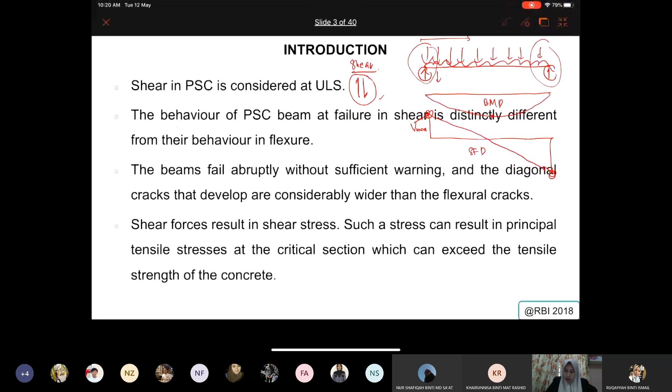Okay. Wait only, because just now it's already the something.

So shear in pre-stressed concrete is considered at ultimate limit state. The behavior of a PSC beam at failure in shear is distinctly different from their behavior in flexure. In terms of failure, shear is different from flexure. Flexure is when the failure of your beam is caused by moment or bending, and the beam fails abruptly without sufficient warning.

So what's the comparison between shear and bending moment? When bending moment failure happens, you'll be able to see the beam actually bend slowly until it fails. But when you have shear, normally it will appear only as a small crack, and then suddenly when the beam fails to cater the load from shear, it will fail abruptly, cracking, and there will be a big gap—it's already collapsed.

The diagonal crack that develops is considerably wider than the flexural crack. Shear crack is normally in diagonal direction, not straight direction—it will normally be diagonal. So diagonal crack is normally considered as shear failure.

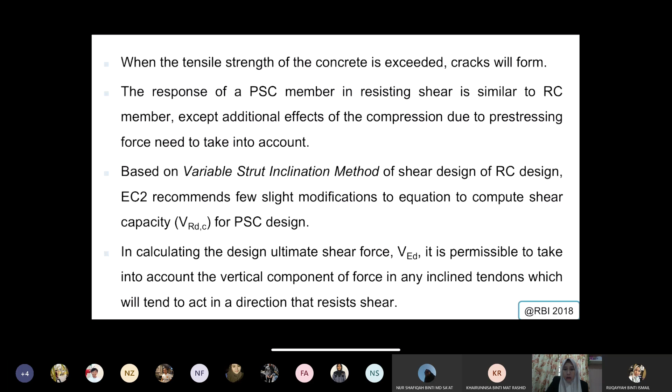So in calculating the design ultimate shear force, VED, which you calculate from your self weight and your loading, it is permissible to take into account the vertical component of force in any inclined tendon, which will tend to act in a direction that resists shear.

So looking at this, just to go through this before we go any further—for a concrete beam, for a typical reinforced concrete beam, where will be the location of shear failure to happen? Anyone, may I know the answer before I call a name? Does anyone know where the shear failure normally appears? Where will the shear failure always appear—the location in a beam?

Fitri says near the support. Jacqueline says the middle, at the middle. Anyone else? Aina? Maybe?

Middle, between support and at the mid span.

You guys also have to be aware when you design your structure member. It's not about your capability in terms of answering at the mid span, or your capability to solve questions or answer past years. I know that's what you've been trained for, because you need to answer exam questions, final exam questions. So when you answer questions, normally all the parameters are given, so you only have to design within the parameters, whatever information is given, because we have kind of a constraint in answering questions in the examples or in your final past year's questions.

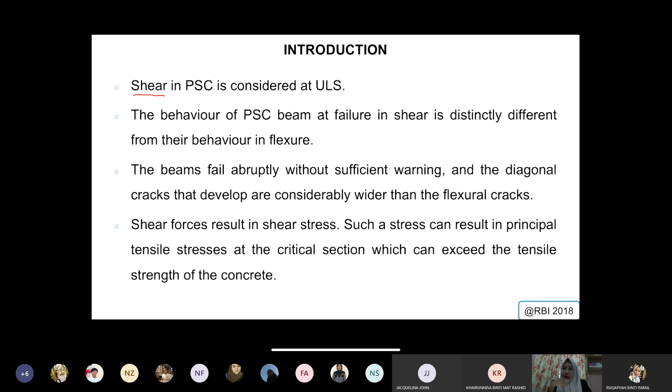So the word shear, you have to understand it well, because it's not just about knowing where the failure is, but you also have to understand why it happened, how it happened. Let's take a look at this.

We have one simply supported beam, a very common simple beam. We have a UDL load applied. Normally the first thing we do when we analyze any structural beam is we come up with the bending moment. So we know it's something like this - this is your bending moment diagram. Bending moment is zero at the support, and there's a maximum moment at the center.

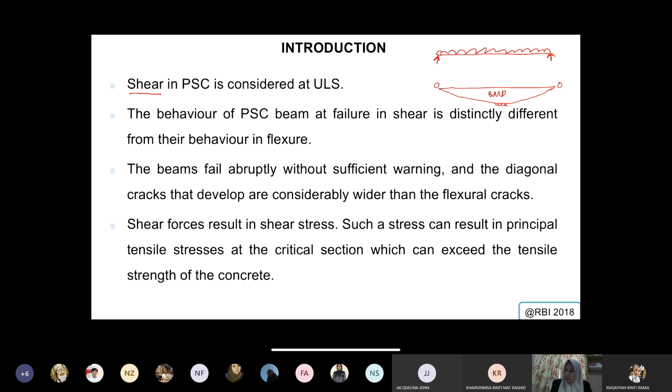So when the failure of a beam is caused by the bending moment, we call it flexural failure. So another diagram that we always draw, we always refer to, will be your shear.

This simple diagram also gives you so much information for your understanding. You see that at the maximum point, the maximum failure will happen. This is the maximum capacity, taken from this value - this is for moment. The same thing for the shear - the maximum happens here. So that's why normally for shear, failure will happen near to the support.

Why? The behavior of the shear is always like this. This is a shear because you have two different positions or directions of load applied - one is going up, one is going down. In our case, one down is the load applied, and one up will be the support. So theoretically, we say that whenever load is applied to a beam, it will be supported by a support.

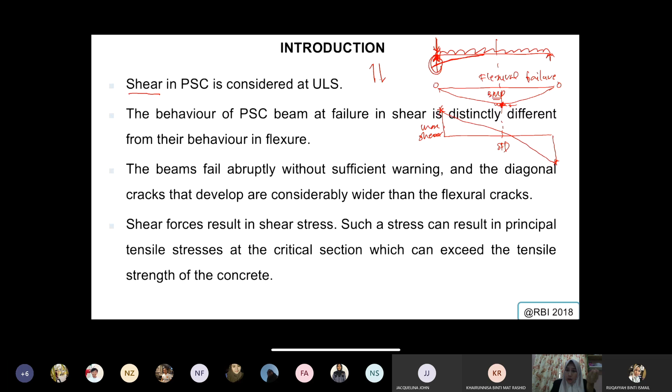But what will happen if the beam itself is kind of weak, both not in sufficient condition in terms of the load applied and also the support - then it will cause the shear to happen. The shear happens when the material is not compatible with the load applied and not compatible with the support used. So this position is where normally you will see the shear failure happen.

A simple diagram like this is able to explain the behavior of one span of a beam. This is very basic understanding that you should be able to explain, especially considering you almost graduate. When you design, you must always counter these issues, because we know a beam will fail in terms of moment and will fail in terms of shear.

When you do your RC design, these are our two main failure issues covered in RC as well. So the same goes for your pre-stress design, because it's still a beam with an additional tendon, of course.

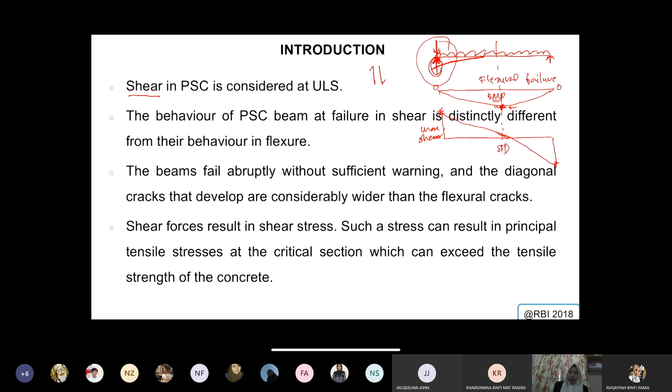Okay, let's take a look next. Okay, we have covered this. So in a way this is like the shear force that we consider when we design for shear. We take into account the vertical component of force due to inclined tendons.

Where pre-stressing force, we multiply with the partial factor of safety, which is 0.9 as usual. So this increases shear resistance considerably by enhancing the shear capacity, which is the shear resistance.

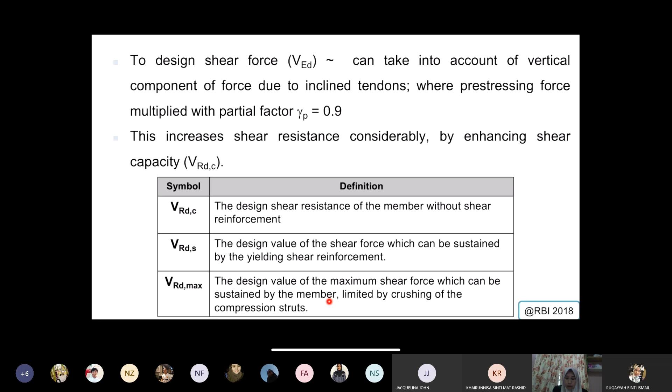So we have a few conditions whereby you have resistance VC, which is without shear reinforcement. So we have resistance VS, which can be sustained by yielding shear reinforcement, and also you have shear resistance maximum, where the design value of the maximum shear force can be sustained by the member, limited by crushing of the compression strut.

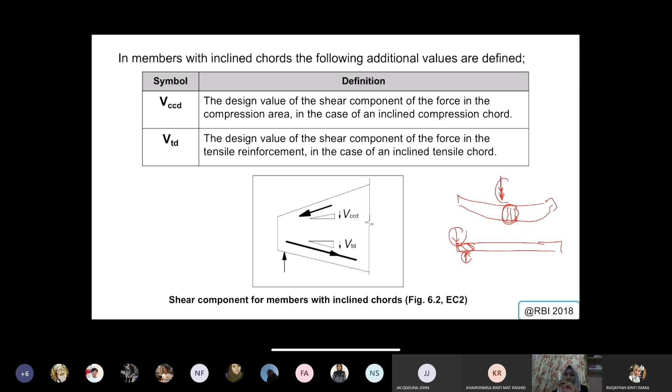But for shear, the thing is a bit different because you have two different forces applied, and the failure will happen something like this - the crack is inclined. So the relationship between the failure, which is the crack in this case, and the direction of the force, and also the support or the load applied, it cannot be related directly as you relate the failure and the load applied for moment calculation. So that's why you have to consider the direction or inclination of the crack when shear happens.

All right, for example, like this figure you can see - this figure is very clear, right? I really like this figure because it shows the location of each failure that happened in one particular beam. So this beam is actually not a simply supported beam, it's a continuous beam. It's very common when your beam looks something like this for your moment - you have hogging here, and positive sagging there. And the same thing with your shear.

Cracking in pre-stressed concrete beam at ultimate load depends on the local magnitudes of moment and shear. So the crack is always the initial cause of a failure, the initial sign of failure. So the more cracks that happen, the worse the failure will be to the beam.

So here let's take a look at region A. You will see the vertical line here, something like that - this is what we call a flexural crack. Flexural crack means that you have your ultimate limit state in flexure, meaning the failure or crack is caused mainly, solely, by moment only. So that is where we initiate it, or we call it region A, meaning located at region A.

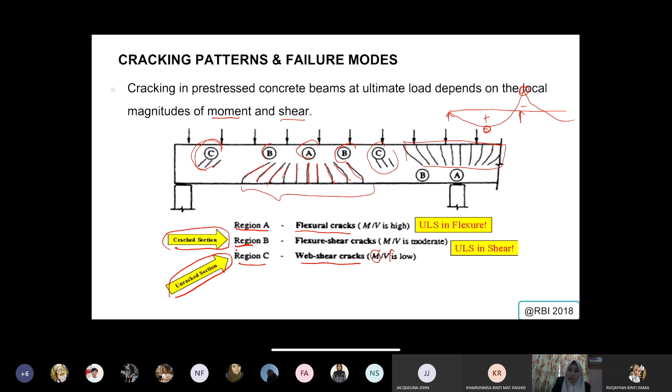This is region A. Here you have A, and you will see vertical cracks below, near the underneath of the beam section, and another one above. So it actually acts for your moment, moment for sag and also moment for hogging. All right, so this is the explanation of each typical region.

Let's go through it as explained before. In the region where the moment is large and shear is small, like M over V, we have a higher value, so the moment is higher and the shear is small. So vertical flexural cracks appear after the normal tensile stress in the extreme concrete fiber exceeds the tensile strength of the concrete.

So we have it here. This is region A. At this point, the normal tensile stress in the extreme concrete exceeds the tensile strength of the concrete, and that's why you have the crack up here.

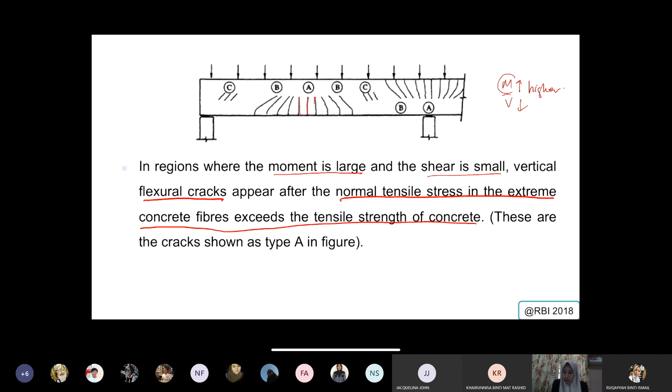Next we have region B, where both the moment and the shear force are relatively large — could be moderate, could be large, more or less the same. The flexural cracks, which are vertical at the extreme fiber, become inclined as they extend deeper into the beam, owing to the presence of shear stresses in the beam web.

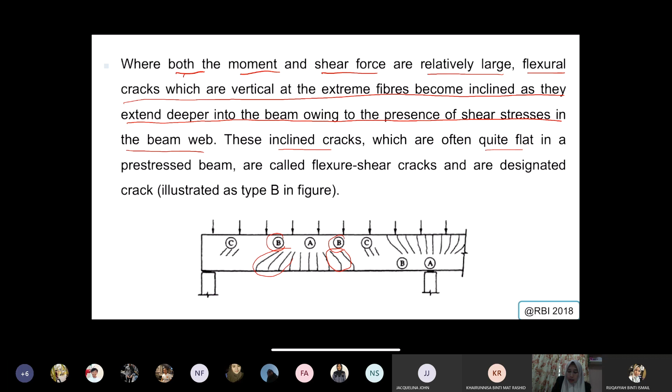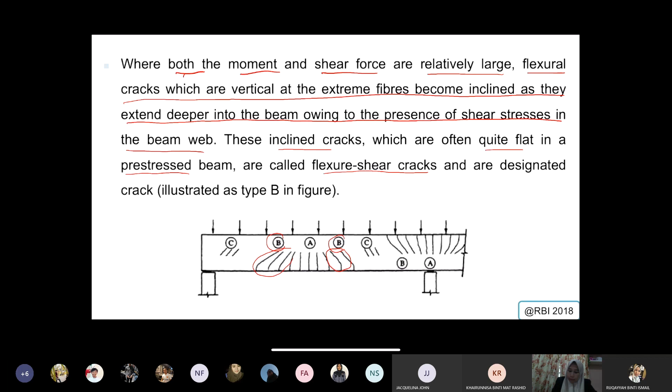That's what actually causes the inclination of the crack at this beam region. These inclined cracks, which are often quite flat in a pre-stressed beam, are called flexure shear cracks — a combination of two failures caused by moment and by shear. We call it flexure shear crack, designated as B. You can see it here.

If adequate shear reinforcement is not provided, the flexure shear crack may lead to what's called shear compression failure. When you see the crack forming, in design you always want to avoid the failure from happening. If we know the failure will happen, we provide reinforcement to avoid it. If you don't provide it, that's where the failure will happen.

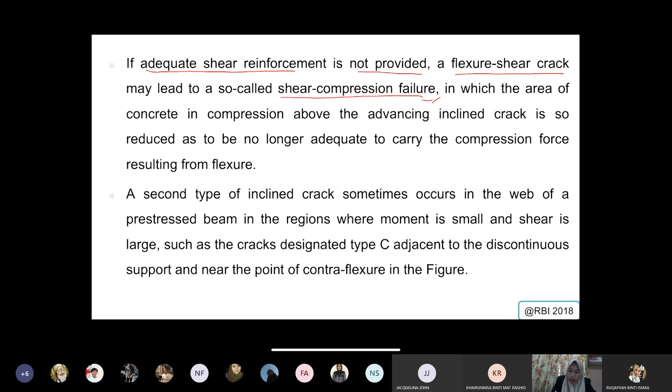So if you don't provide adequate shear reinforcement, shear compression failure will happen, in which the area of concrete in compression above the advancing inclined crack is so reduced that it is no longer adequate to carry the compression force resulting from bending. That is what actually happens in region B.

The second type of inclined crack sometimes occurs in the web of the pre-stressed beam. The web is where you have something like this, happening in the middle of the section, normally with a thinner width and so on.

So this second type of inclined crack sometimes occurs in the web of the pre-stressed beam, in the region where moment is small and shear is large. Such cracks we call type C, adjacent to the discontinuous support, near the point of contraflexure in the figure. That's what we commonly see, normally near what we call the discontinuous support.

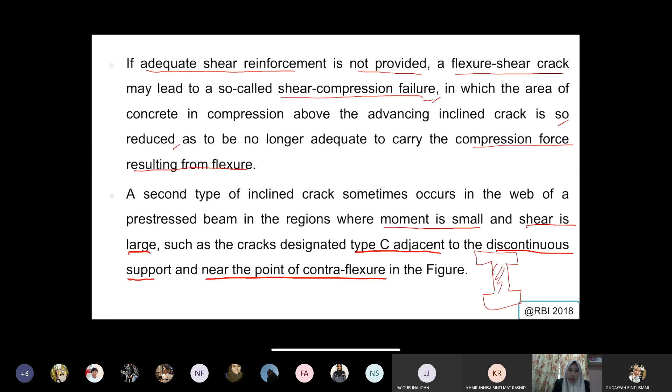So in such locations, what happens is high principal tensile stress may cause an inclined crack in the mid-depth region of the beam before flexural cracking occurs in the extreme fiber. These cracks are known as web shear cracks, and they occur most often in beams with relatively thin webs, which is very common for pre-stressed beams.

We have a thin web because we rarely use a rectangular solid beam. We rarely use it because we have to go back to why we use pre-stress in our beam - so that we can have smaller sections. We want to optimize the section because once we reduce the section of a pre-stressed beam, we can reduce the weight of the concrete. So it's very common for pre-stress.

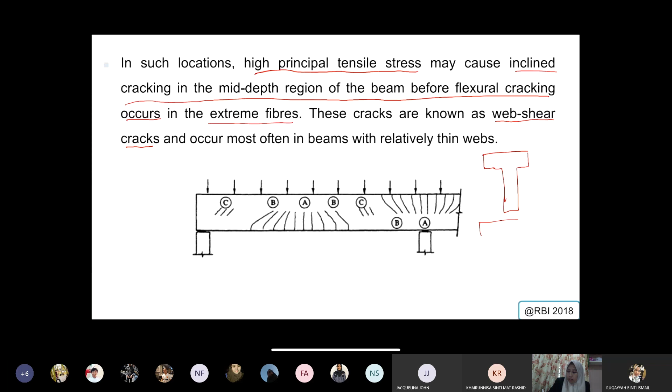We have like a T section, where the web is thinner than the flange. You could have an I section, a hollow section, or a U section. It's not like this - U section normally prefers like this can shape. All right, so that's about it.

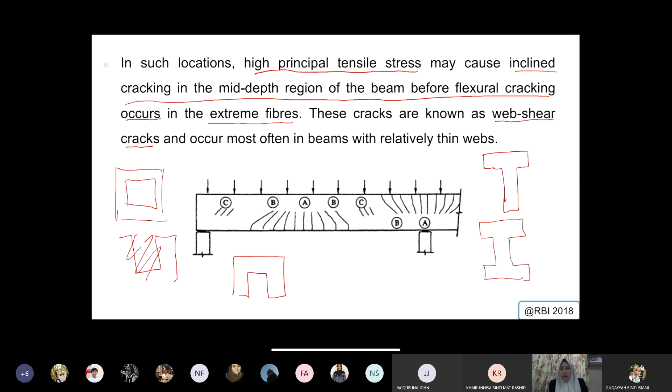So how about the effect of pre-stressing in shear? We know pre-stressing in moment sometimes contributes such that you do not need additional reinforcement to cater for your moment because it's already catered for by your tendon. But how about pre-stressing in shear? Longitudinal compression introduced by pre-stress delays the formation of each of the crack types shown previously. It doesn't replace it, but it kind of delays it.

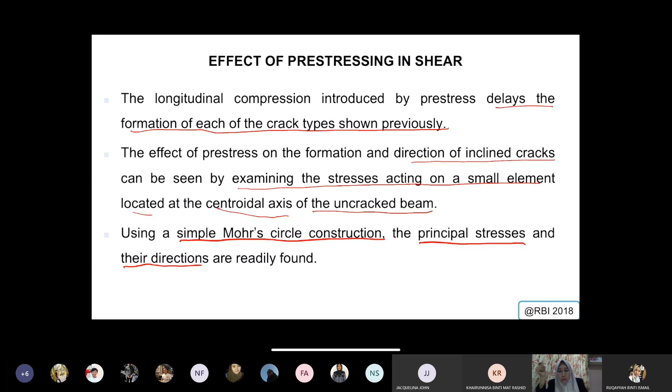The effect of pre-stress on the formation and direction of inclined crack can be seen by examining the stress acting on a small element located at the centroidal axis of the uncracked beam. So to know the effect, you can examine the stresses for the uncracked beam by constructing a simple Mohr circle construction, because we want to know where the principal stress is and its direction - since we're talking about diagonal crack with a vertical load applied, and how these two interact.

So when the pre-stress is 0, the principal stress 1 is equal to the shear stress, which acts at 45 degrees to the beam axis. If diagonal cracking occurs, it will be perpendicular to the principal tensile stress, which is at 45 degrees to the beam axis - so it will be about 45 degrees.

So when the pre-stress is not 0, the normal compressive stress reduces the principal tensile stress 1 - we consider it as one direction. The angle between the principal stress direction and the beam axis increases. Consequently, if cracking occurs, the incline will be flatter - not necessarily 45 degrees, but lesser, getting flatter, like maybe 22 degrees and so on.

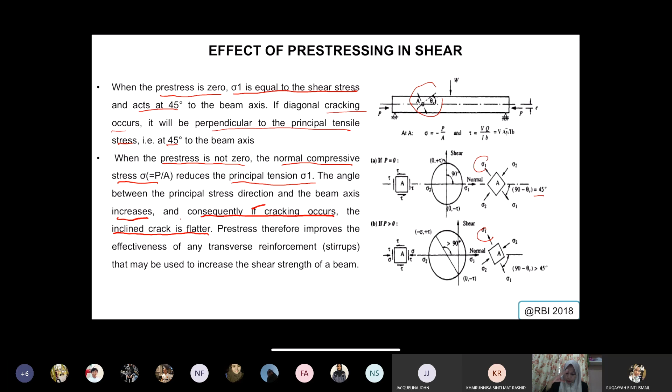So pre-stress therefore improves the effectiveness of any transverse reinforcement or stirrup that may be used to increase the shear strength of a beam. In a way, the tendon itself, if you look at the relationship in your Mohr circle with your principal stress, will improve the effectiveness of the transverse reinforcement because it helps flatten the angle of the crack. So it increases the shear strength of a beam as well.

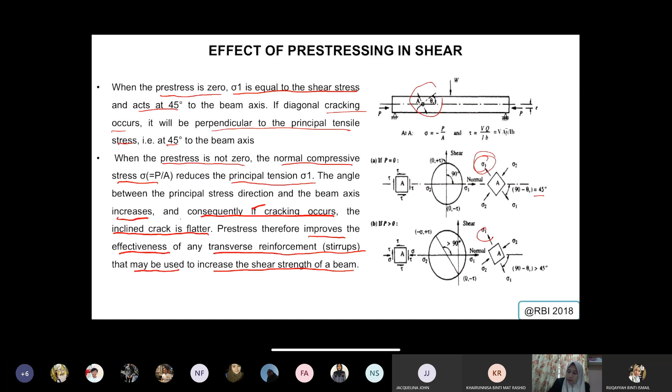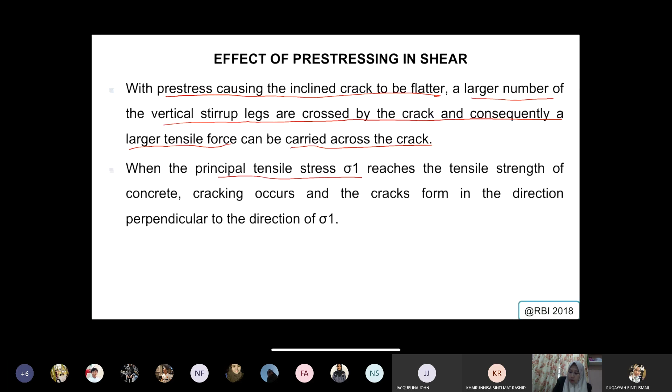With pre-stress causing the inclined crack to be flatter, a large number of vertical stirrup legs are crossed by the crack, and consequently a large tensile force can be carried across. So you can provide a large number of vertical stirrups. And when the principal tensile stress, stress 1, reaches the tensile strength of concrete, cracking occurs and the crack forms in the direction perpendicular to the direction of stress 1.

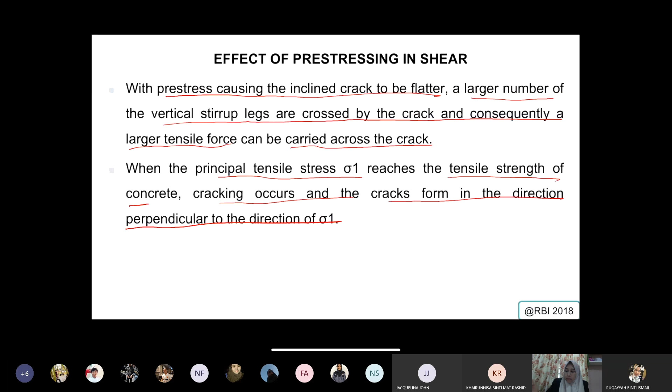You have to ensure that whenever you provide your shear reinforcement against the crack, it has to always counter it - because you want to avoid it from happening, so of course you want to provide something that opposes it in that particular direction. So that's more about the principal behavior.

So now let's take a look at how we want to check our shear capacity.

Okay, how do we want to calculate it. There are three main conditions in terms of what you want to consider when you design your shear capacity for your beam, for your pre-stress beam.

First condition will be we want to assume the condition of your beam. The section does not require any shear reinforcement. That's number one. It means that when you check, you know that your section does not require any shear reinforcement.

Second condition is the shear strength without shear reinforcement, still don't have shear reinforcement, for uncracked regions in bending. Means the beam have applied load, have bending, but the bending does not cause any crack. So the shear strength is, of course, when then you don't have any shear reinforcement. But this is actually very rare to happen, but somehow it's a condition that we have to consider, because normally when you apply load, then of course the bending will have a crack.

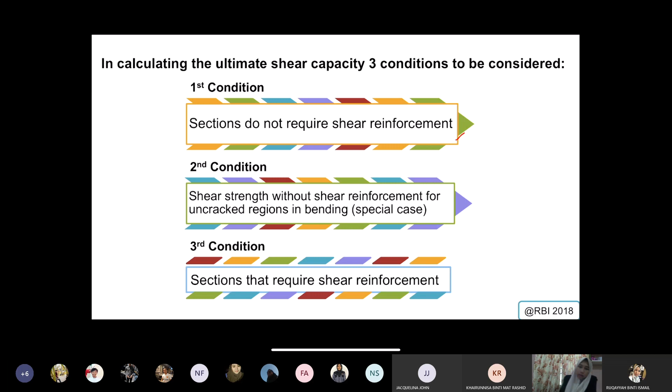Third condition will be section that requires shear reinforcement. So this is the common case, where you design, then your section requires shear reinforcement. Okay, now take a look at the first condition.

So the first condition, where the section does not require shear reinforcement, whereby your design shear is lesser than the resistance. So obviously when your design shear is lesser than your shear resistance, you do not need any shear reinforcement. So calculating shear reinforcement is not necessary in this condition, but it is necessary to provide minimum shear reinforcement.

Unless for very short span beam or lightly loaded lintel, for example, where the beam does not cause any stability issue to the whole structure, then you do not need to provide any minimum shear reinforcement. A lintel is like a small beam actually, but it doesn't carry much load.

So when, on the basis of the design shear calculation, no shear reinforcement is required, minimum shear reinforcement should nevertheless be provided according to clause 9.2.2. So the minimum shear reinforcement may be omitted for a member such as a flat member.

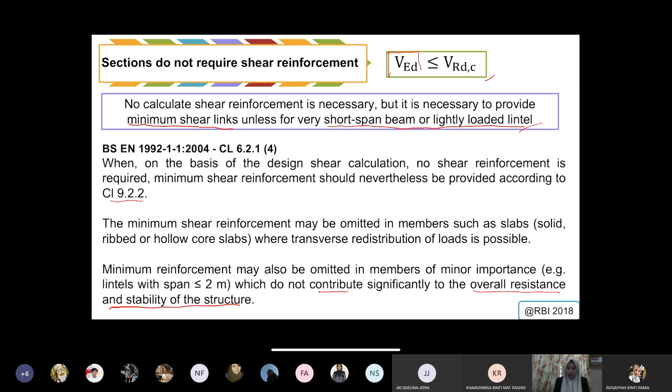So what will be the minimum shear you have to consider is actually you have to calculate what will be the resistance, the resistance capacity of the shear, and the minimum is this value. So there are few parameters that you have to take note in terms of these equations.

One is the CRd,c, which is the resistance, the values. Then next you have the rho 1, and then you have the stress of your tendon. And we also have the v min, and also K. So what will be the value, the K?

Where you can use these equations for the K value. Just take D as your effective depth. Your rho 1 is where you have the ASl over BW over D, the web of your width.

And your ASl is actually your tensile reinforcement area, where you have considered this during design. And you have your tendon stress. You can use this formula, which must always be lesser than 0.2 fcd. You have to check. And then this is your axial force.

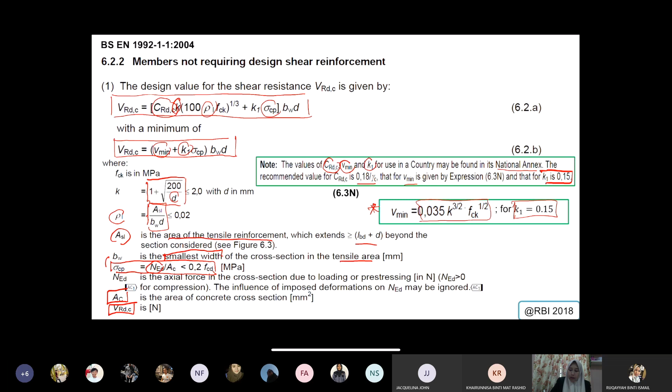Okay, so I hope you guys are clear in terms of the formula, where's the value coming from, one by one here. So this is the simplified version of what we have, go through it just now. We have the resistance with the rho 1, K, and then the stress of the tendon, the sigma cp, the K, which is where you calculate your stress of your tendon. So, definition of ASL.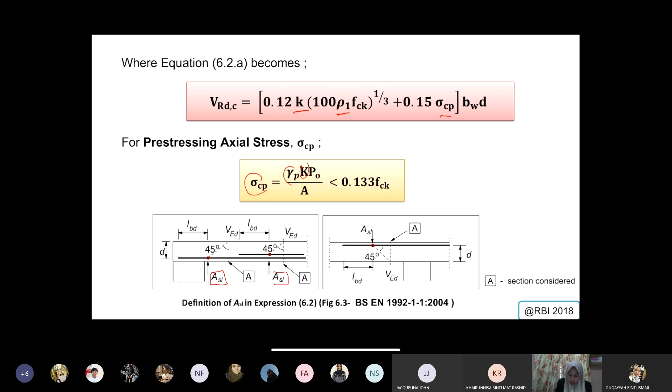So what will be the ASL? This is your ASL, the area of your tension reinforcement. So this is the point. This is the area of your ASL, can be taken from this point where your angle is considered.

Second condition, which is you have uncracked in bending. So it's a special condition because it's not really commonly happening. So in region of uncracked in bending where the flexural tensile stress is smaller than this, we call it as uncracked bending.

The shear resistance should be limited by the tensile strength of the concrete. So your FCTD is limited value of principal tensile stress. So your ultimate shear resistance of the uncracked section becomes this.

Where you have your I multiply your BW, which is your width, divide by your S, and you multiply with the square root of FCTD power of 2, plus alpha 1 multiply with stress of tendon and also FCTD. And in a way, you calculate your stress of your tendon as what you calculated before.

And you have your FCTD, which is your tensile strength of your concrete, divided by your partial factor of safety, gamma, where you have two values depending on the method of your prestress. So either you are using post-tension or you're using pre-tension, so it could be equal to 1 or it could be lesser or equal to 1.

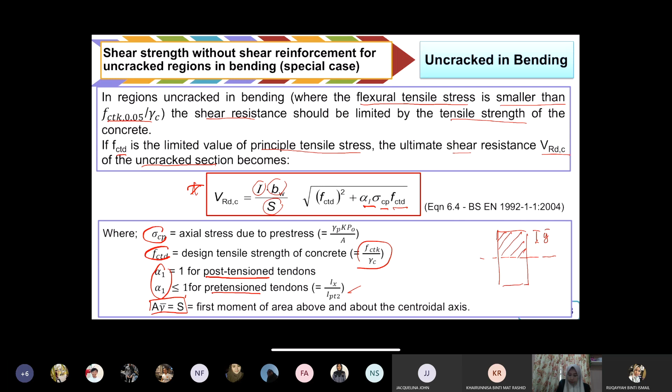So your neutral axis is here, and then you have your Y bar taken from the top to this, for example. This is your Y bar, and then you have your area above the neutral axis. So next, this is more or less the same as simplified before, the simplified term of what we have said in terms of alpha 1 for post-tension and also for pre-tension.

So for cross section where the width varies over the height, the maximum principal stress may occur on axis other than the centroidal axis. In such a case, the minimum value of shear resistance should be found by calculating VRDC at various axes in the cross section, so you have to consider all cross sections, because you might have a different width.

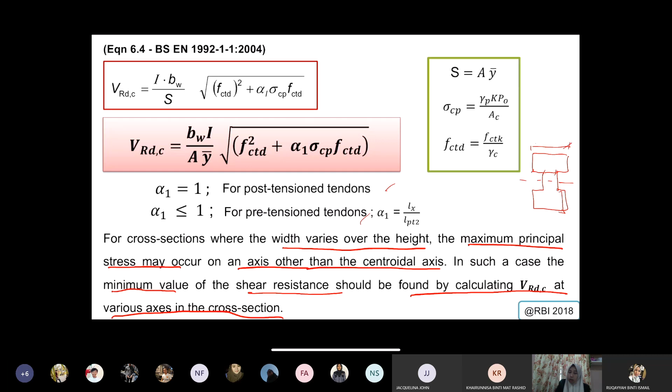For example, like you have here, say that you have your neutral axis here, so you have this different width, this is also different width. You have to recall back in terms of how to calculate it like this. All right, so you have it centroid, like this, something like that.

I think you have to recall back how to calculate your shear stress. This is actually the same - it's not the same, but this is how you calculate your shear stress, I think in your solid mechanics, if I'm not mistaken. So this is where you're going to apply, you must be able to use it here.

So at uncracked section, a Mohr's circle analysis of a beam element which is subjected to a longitudinal compressive stress, which is your FC, and your shear stress, which is your VCO, gives the principal stress as this. For example, this is a typical VCO location for your stress, this is your stress, your principal stress.

So this is what we call your compression. Your FT will be equal to this, where you have your VCO into account and also your compression, which you can rearrange by taking only your shear stress, and recalculate what will be your shear stress based on your compression stress and also tensile stress.

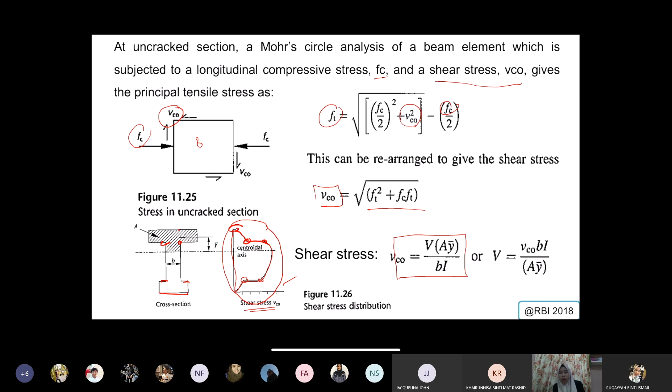So this is where you also calculate your shear stress based on this figure. That's why I'm saying when you have a different width, for example starting from here, different width, you have this point, at this point, at this point, and also this point. I think you can recall back how you want to calculate your shear stress at that point.

So here is the last condition, where you consider that you require the sections, shear reinforcement, sections that require shear reinforcement. So when you want to consider shear reinforcement, section that require shear reinforcement, we apply the variable strut inclination method, where we expect that the crack is inclined.

Similar design to shear in RC member is not much different from RC. So we consider the angle, the diagonal compressive strut, and excessive compressive stresses should not occur in the diagonal compressive strut, of the assumed truss, which leads to the compressive failure of the concrete.

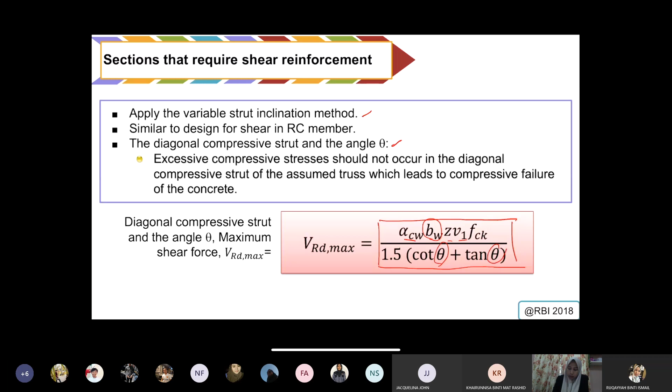So the diagonal compressive strut and the angle theta, maximum shear, will have this formulation that you can refer to or use, which is this is the width of your section, and your Z, and also your V1. This is cotangent theta and tangent theta. Let's take a look one by one, shall we?

So in this case you have what we call the strut. This is the method, the variable strut inclination method, where you estimate what will be the angle inclined by the potential crack that will happen in a beam.

And then this is the spacing of each reinforcement, and this is the force, the compression, and then this is tension. So this is the vertical force that will act vertically to the angle of the inclined crack, because that's why you have the V representative of cotangent theta and also cotangent alpha, because you have two inclines: one inclined in this direction, and another one inclined in the other direction.

And you have all the acronyms, all the abbreviations: the alpha, the angle, the FTD which is the tensile force, the compression force, the BW, and also your Z, which is the inner lever arm.

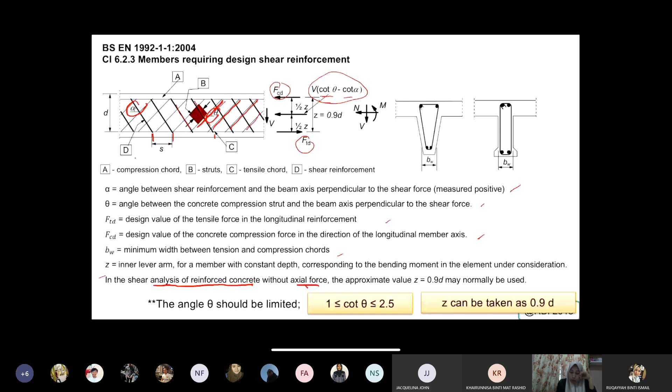So Z can be taken as 0.9D. So in the shear analysis of reinforced concrete without axial force, you can say that your Z equals 0.9D, because that will be your maximum height for your Z.

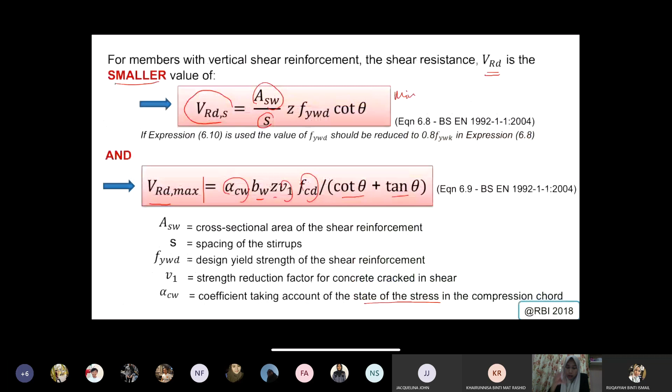So in a way, we can also simplify this equation by looking at the next slide. Okay, it's moving.

So the value of V1, which is the reduction factor of your shear, and then alpha CW - normally this is used in the national annex. Recommendation of V1 for shear, you can see here where you can take it from the BSEN, calculated by considering the concrete strength. And if the design strength, the stress of the shear reinforcement, is below 80%, you have two considerations: one is when your FCK is lesser than or equal to 60 MPa, or when your FCK is bigger than 60 MPa.

We normally don't say equal. But then you can take your shear reduction factor as 0.6, and also the reduction factor of 0.9 minus FCK over 200, which must always be bigger than 0.5. You also have the FCD for your concrete, where you take your FCK concrete strength divided by the partial factor for concrete. So that is more about V1, or what we call the reduction factor.

These are the strength reduction factors in shear. For alpha CW, you take the value based on the value of stress for your tendon, which you calculate - where is the formula from just now? Stress tendon, in the beginning you can see the formula for this one. So the stress tendon you calculate, and then you check whether it's bigger than 0 and lesser than 0.25 FCD, or bigger than 0.25 and lesser than 0.5, or bigger than 0.5 and lesser than 1.

Each of these conditions will have a different value of alpha CW. If it's non-prestressed, then directly alpha CW is equal to 1 - that's why we don't consider alpha CW when designing that system. But if your tendon calculation falls within this range, you have to calculate your alpha using this equation. If it's the second range, you can simply take it as equal to 1.25. And if it's in the third range, you have to calculate by considering this 2.5.

Hope you are clear in terms of getting your reduction strength factor and alpha CW. Just to highlight at this point: CP is the mean compressive stress, measured positive, due to the axial force, which in this case is the prestress force. This should be obtained by averaging it over the concrete section, taking account of the reinforcement. The value of stress CP need not be calculated at a distance less than 0.5d cotangent theta from the edge of the support - that is the distance you can consider.

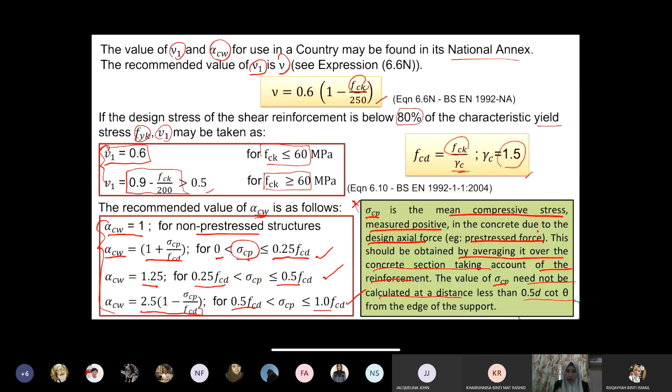Your shear maximum, for each condition where your cotangent is either equal to 45 or equal to 22 degrees, will differentiate the value of your shear maximum - this gives 0.124, and this one becomes 0.18. Or you could also simplify by considering your theta values, and estimate whether it's lesser than 45 degrees, or in this case lesser than 45 degrees for this condition. So there are two conditions to consider in terms of calculating your theta.

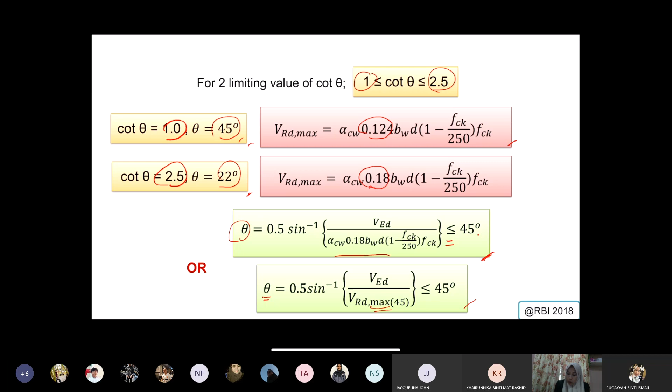So if we consider that for prestress there are two possible conditions as well - we have one with bonded condition, one will be unbonded condition. So when you have bonded, we have grouted duct, and if we have unbonded, we have non-grouted. So that is what we are actually dealing with.

Because this also will contribute to different conditions in terms of what will be the nominal web thickness. These values, your BW norm, so your web thickness, nominal web thickness, will depend on the condition of your duct, either it's grouted or it's not grouted. So you have this condition.

So you have your outer diameter of your duct. This is your outer diameter of your duct, and then this is like the summation, the most unfavorable level. So what will be the values of the diameter of your duct? You have your B, your width of your section, minus 0.5 multiplied with your diameter.

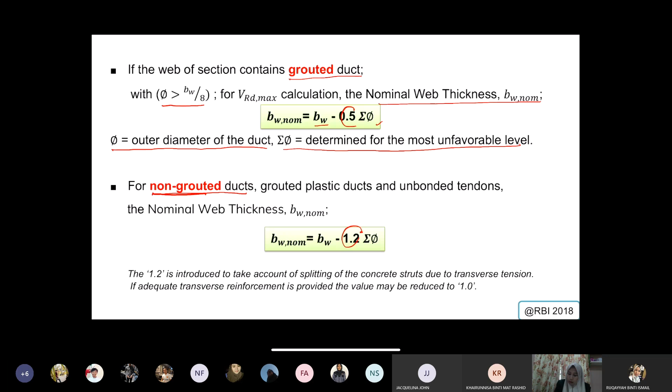For the case of non-grouted, it's much simpler because instead of 0.5, you minus with 1.2. So you have this, 1.2.

So, vertical shear reinforcement. If we want to provide vertical shear reinforcement, then it is assumed that all the shear force is carried by this reinforcement and the contribution of the concrete is neglected. So we can calculate your ratio of area for your shear, and then we have to ensure it's bigger than the minimum required by EC2, which is this one.

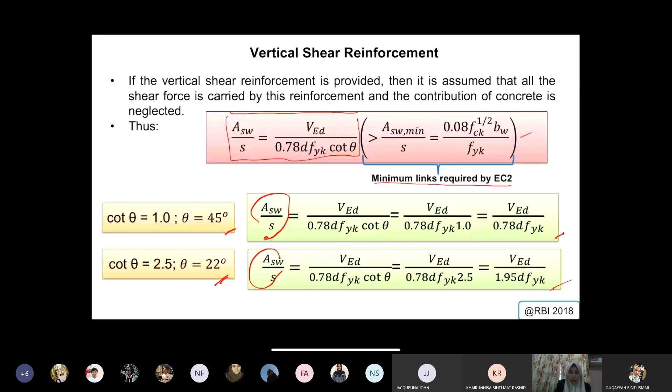In terms of the cotangent, we have two different conditions: one is 45 degrees, one is 22 degrees. So we consider that when you have this, and then it's also equal to this and also equal to these values, which come up with the ratio of the area of your link divided by your spacing. So that's when you have to provide your vertical shear reinforcement.

Additional longitudinal force: when using this method of shear design, it is necessary to provide for the tensile force generated in the tension chord of the assumed truss. So we use truss-like calculation to estimate where the crack is, how to place the shear reinforcement, how to counter the crack so that the force can act, and so that the crack will not happen, and so on.

The tensile force in vertical links to be provided in the tensile zone is given by this condition, so we can assume this force. When you assume this force, basically this one, when you have the cotangent, is actually equal to FYK multiplied with ASL. So it's actually more or less the same condition.

To provide this force, untensioned reinforcement of area ASL working at its full design strength must be provided to ensure that this force is developed, and/or the profile of the prestressing tendon may be adjusted to provide greater resistance to the deformation, just to make sure it can provide greater resistance to the design shear force.

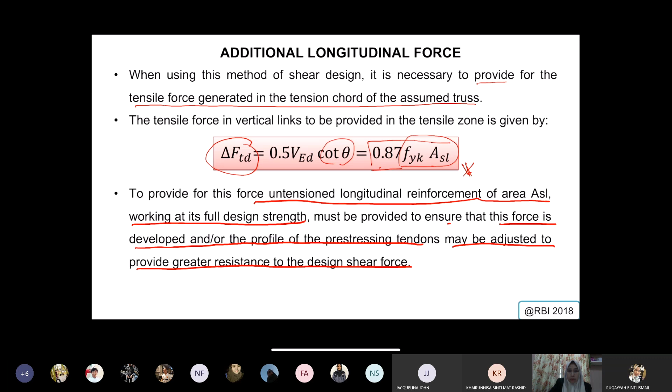Okay, so this is where we summarize our procedure in terms of the shear check, design shear, whether you want to provide it or not, and so on. So the first step is actually to calculate the ultimate design shear force of the beam span, based on your design load and so on.

Then at set intervals along the beam span, commencing at the section of maximum shear at the support, follow the steps below. The section of maximum can be taken to be the face of the support where the maximum shear force is VEd, that will be your maximum design ultimate shear force. So then next, the second step.

The second step is whereby you consider where shear reinforcement is not required, meaning you provide only the minimum shear reinforcement, so uncracked bending or cracked shear is required, uncracked condition. If appropriate, the vertical component of the force in any inclined tendon should be taken into account.

Determine the shear resistance. If required, continue as follows; otherwise go directly to step 5.0. From here, you check whether you need reinforcement or not. If you do not need reinforcement, you only provide minimum reinforcement and go straight to step 5. If you need the reinforcement, then proceed to step 3, where you check the crushing strength, which is the maximum resistance of the diagonal strut.

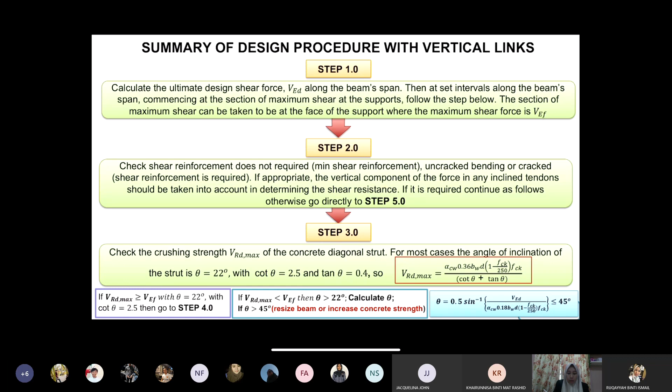Let's take a look at step 4, where you provide your shear link, using ASW equal to the cross-sectional area considering the legs of the link—two legs for a single stirrup. For predominantly UDL, the maximum shear can be calculated at distance D from the face of the support, and the shear reinforcement should continue to the face of the support.

That's the position. The shear resistance for the link can be calculated by taking the V minimum. This value will be used together with the shear force envelope to determine the curtailment position of each set of design links, so you know the curtailment position and so on.

So next, once you provide this, you calculate your minimum link, for cases where you don't need to provide shear reinforcement, then you provide your minimum link, which you also check against the minimum requirement. Then in step 6.0, you calculate the additional longitudinal tensile force, whether it is needed or not.